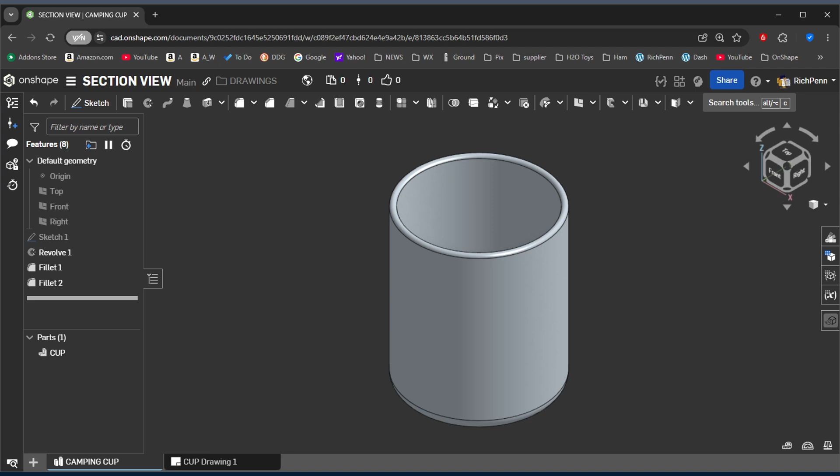This is the model we're going to build in Onshape, or whatever you wish to build it in. It's fairly simple. We're going to build it out of 3 rectangles, 2 straight lines, and a fillet. It's a little different way to build it, but it's kind of fun. Then we're going to come over using the standard drafting tools, no tricks, no shortcuts, just simple drafting, and we're going to come up with this. So grab a copy of this, and here we go.

Okay, starting in Onshape in a new part studio, we'll go to the hamburger menu, pull down, check that the length is in millimeters, and we are in grams for mechanical mass. Green check mark, and we will start.

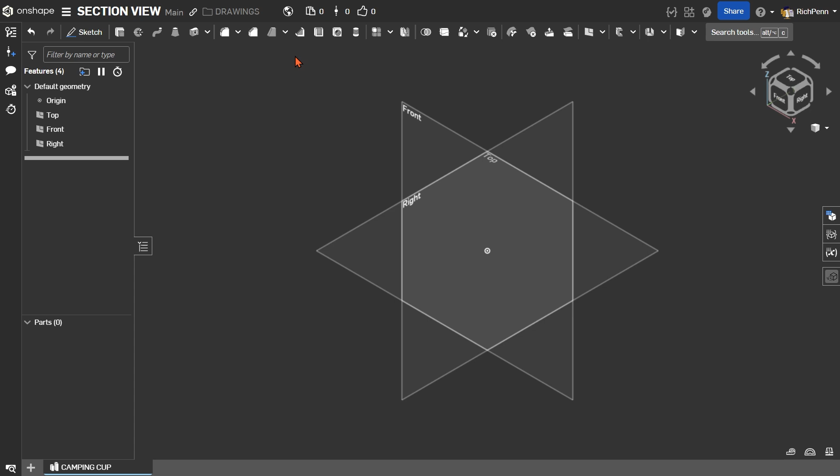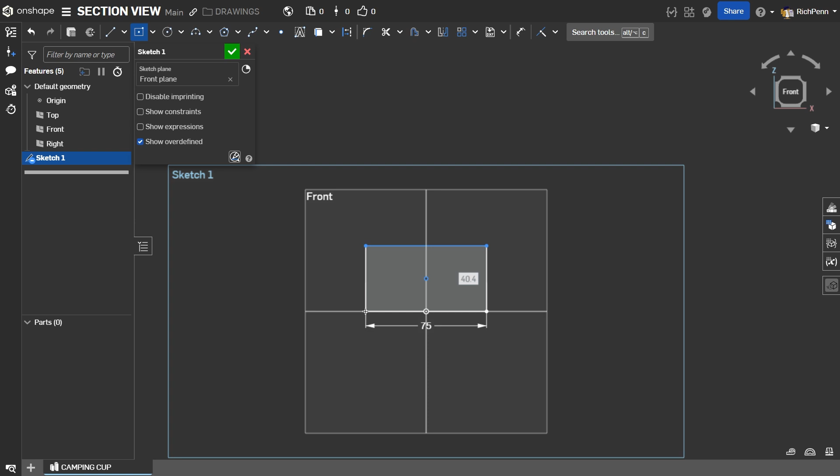I'm going to start on the front plane with a sketch, N for normal, and the bottom of the part is 75 diameter, so I'm going to go to center point rectangle, which is a shortcut key R. Select anywhere on the y-axis, anywhere on the x-axis, type in 75, and the floor of it is 7 thick.

Then I'm going to zoom in a little bit and do the same thing again for the inset. The inset is 55 wide and 3 deep. The wall is 3 thick.

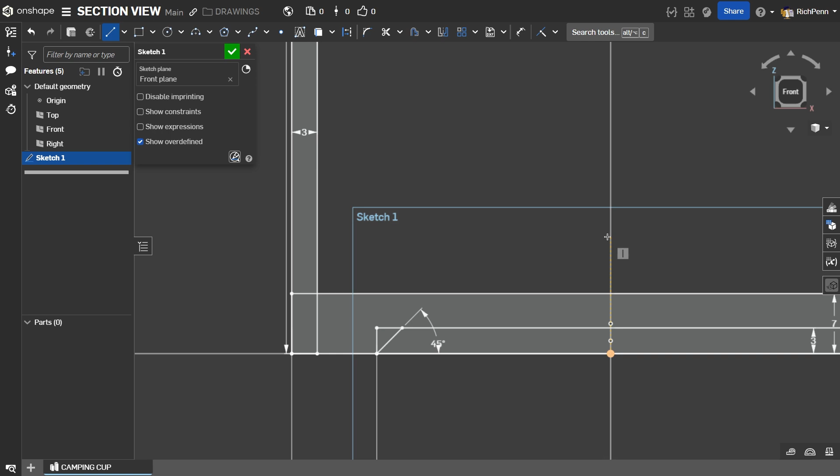I'm going to go to G for corner rectangle, pull up a little bit. 3 is the width, 90 is the height. Then I'm going to zoom in, select the line tool, draw a 45, and dimension it with D for dimension at 45. Escape, L for line, draw a short line segment on the y-axis, and we have finished the sketch.

Green check mark, we will go to the revolve. We will select these parts. The revolve axis becomes the line we drew. Green check mark, and we have a part.

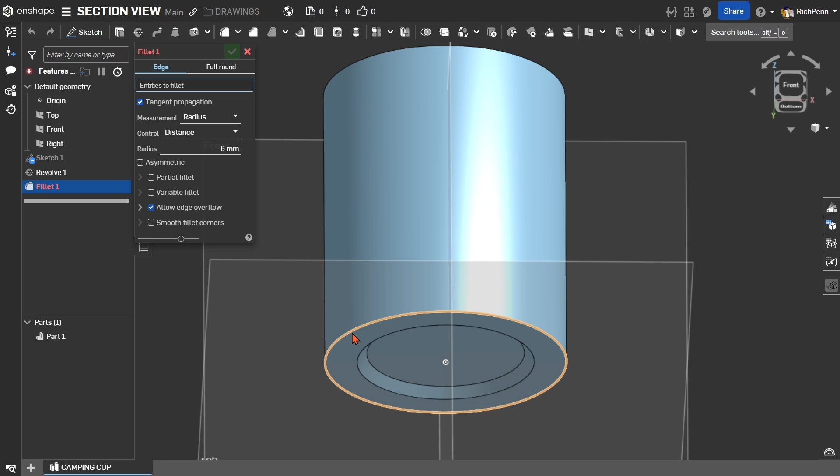We will go to the fillet command, 6 millimeter, select the bottom ring, and we need one in the top ring, and it looks difficult to select, but you don't have to select it. You can simply select the face in the bottom of the cup, and you get the same thing, much quicker.

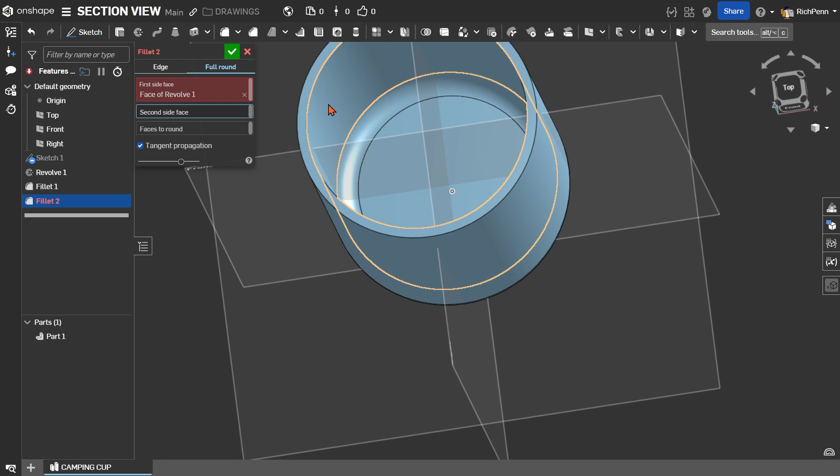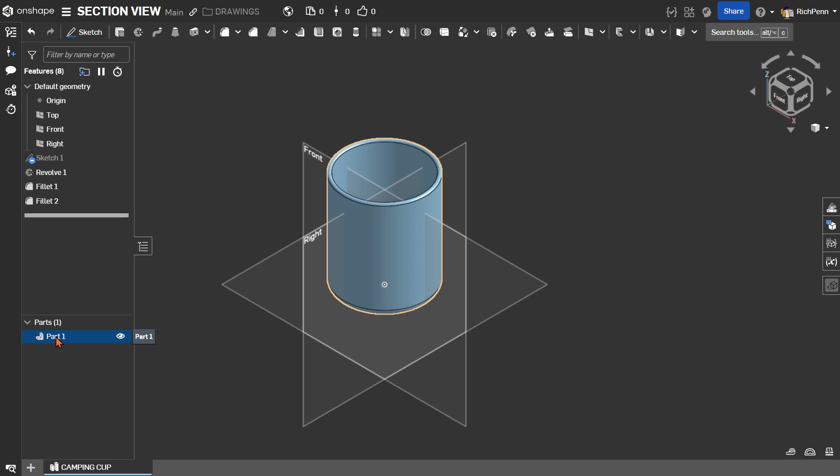Green check mark, one more fillet. This time we'll use full round. Select the inside wall, select the outside wall, and select the top lip, and a green check mark, and the part is finished. We will right click on the part, select Assign Material. Out of the Onshape library, we're going to take 300 stainless. It's not what the model's got on Toby's thing, but it'll work fine for what we want to do. And one more time, we're going to right-click part, select Appearance, and pick an alternate color of some kind. And we have finished this.

Type P for planes to get rid of them, and we're ready to start a drawing. To start the drawing, we will right-click on Part, select Create Drawing. We will go to Existing Templates, ANSI, B, millimeter, No View, click.

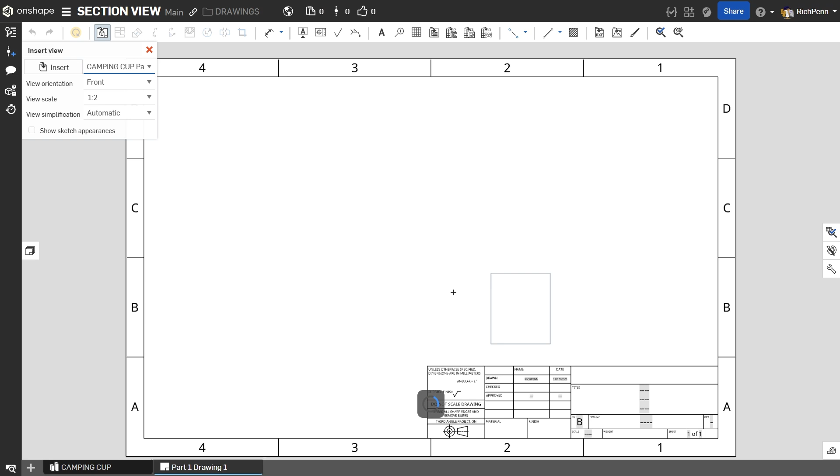When it comes up, it will come up in Insert View mode with a front view of the cup. We'll click once, move up, click a second time, and we'll get a top view, hopefully. And we'll come back down.

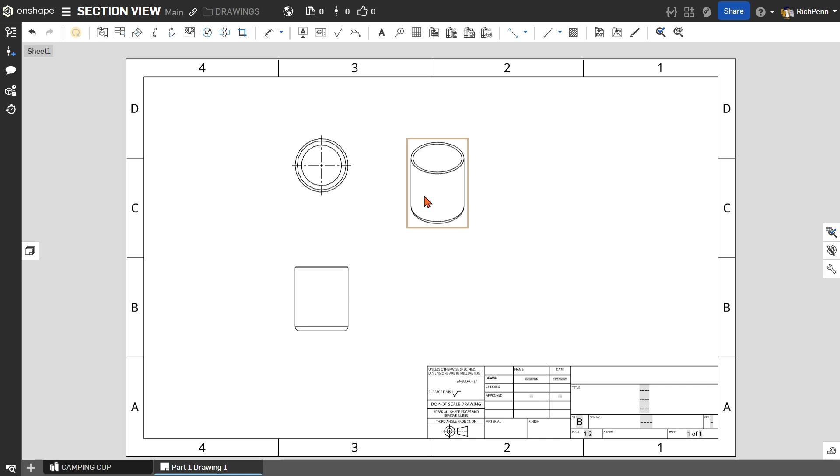I'm going to click this and go diagonal up and get an isometric. Do an escape to get out of insert. I'm going to pull this over, park it, right click, show hide, shaded view. And that gives us our isometric.

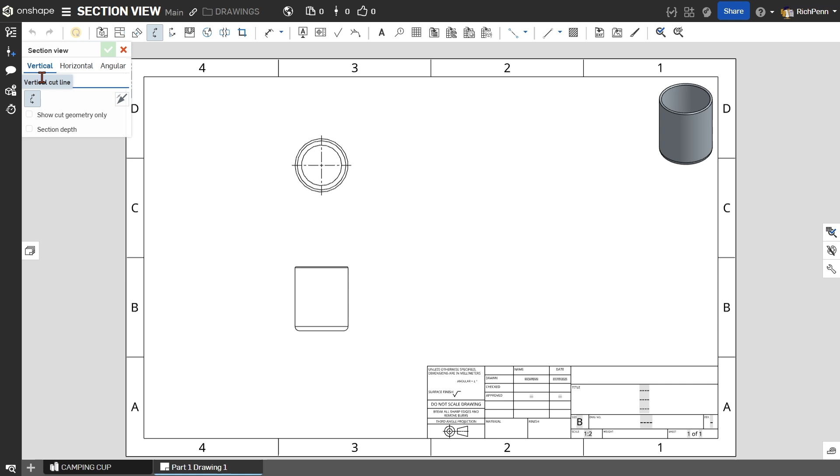We need a section view through the cup. So I'm going to the section view tool, go to vertical. I'm going to take the center, which will be the diamond. I'm going to click once and pull right and click again. That's the section. Do escape.

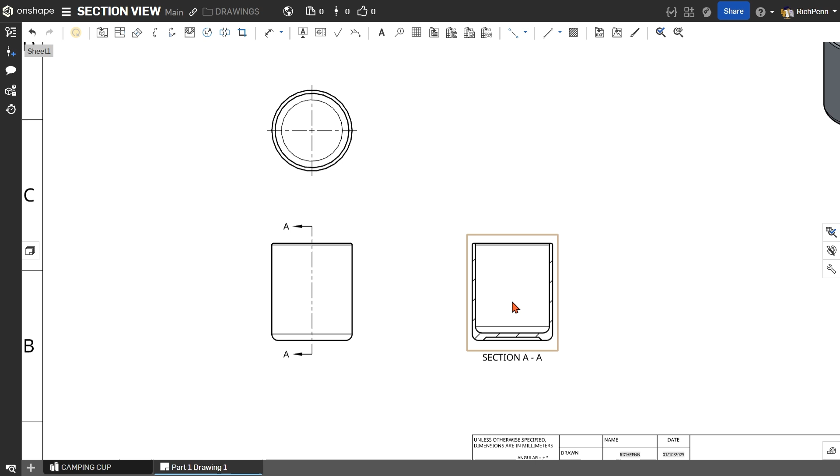What I really want is I want this to be full size and not half size. But also this has a relationship between them, so if I move this, I move that, and I want to break that relationship. Double click left mouse button, select suppress alignment, and then right above it, set this to 1:1, green check mark, and we have our section view.

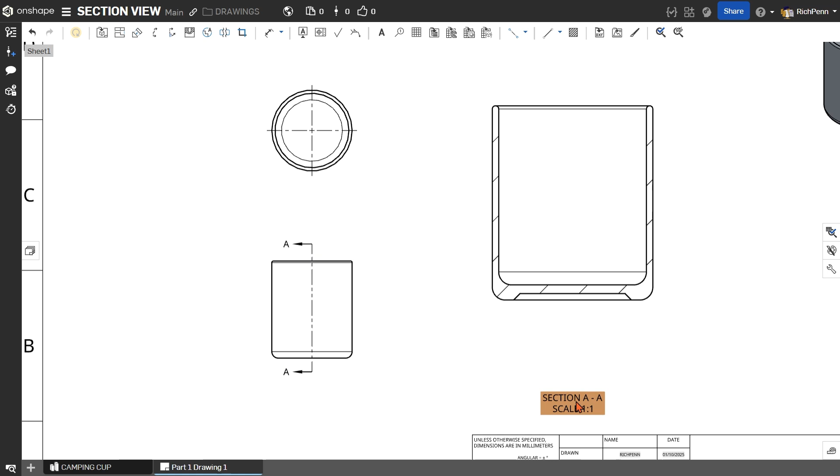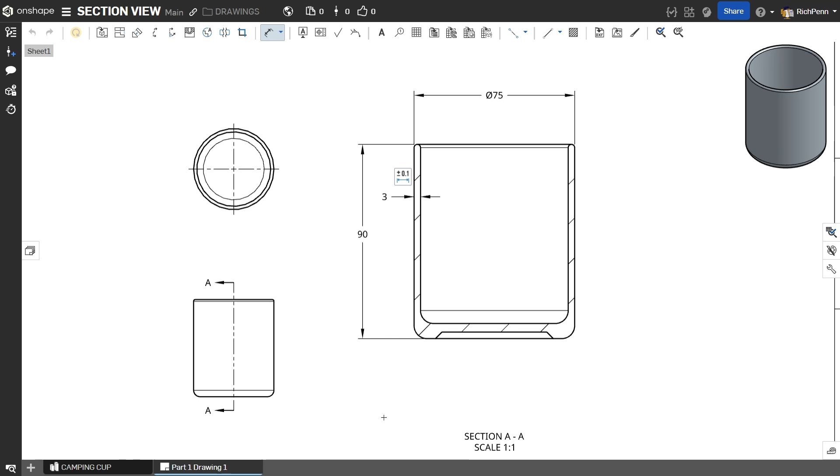Most of this is just like the first part we did: outside, outside, 75, top line, bottom line, 90, wall thickness is 3. What else do we need? We need the inset for

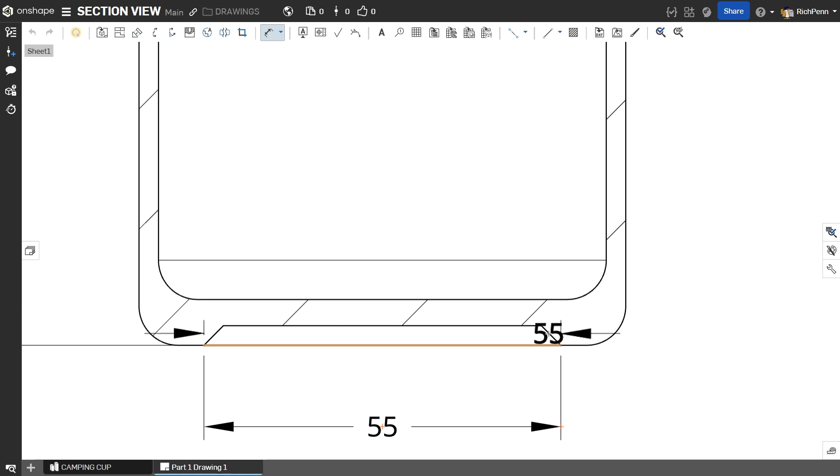the diameter of 55. And we need an angle dimension on this little piece of line right here. Maybe. I missed it, sorry about that. Here to here, 45 degrees. And that defines this inset.

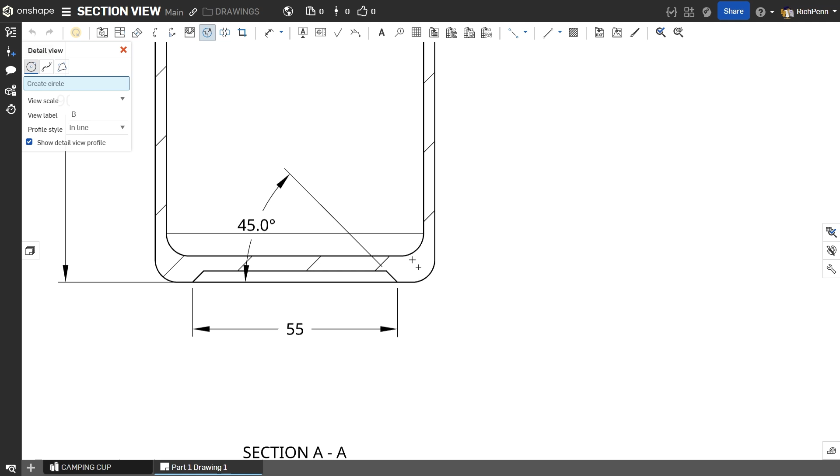Except for the dimension, we will do a detailed drawing of this corner. To do that, we will come up to the Detail View tool, click it, select somewhere in this and pull a circle, click and slide over, and that's the detail. The detail is twice as large as the original by default.

We'll do D for dimension. Dimension that radius, dimension that radius. We'll dimension the 3, and we'll dimension the 4. And that just about finishes what we need.

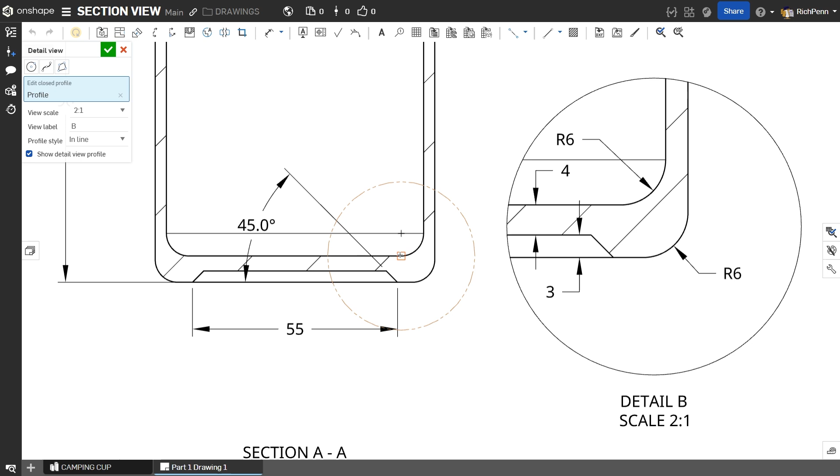What I would really like is to have this circle slightly to the left. To do that, I can escape to get out of dimension, double click the circle that defines it, and I get 5 blue dots. I can grab it and simply slide it. I can make it smaller by pulling on one of the dots, and then do a green check mark, and it will redefine this for me.

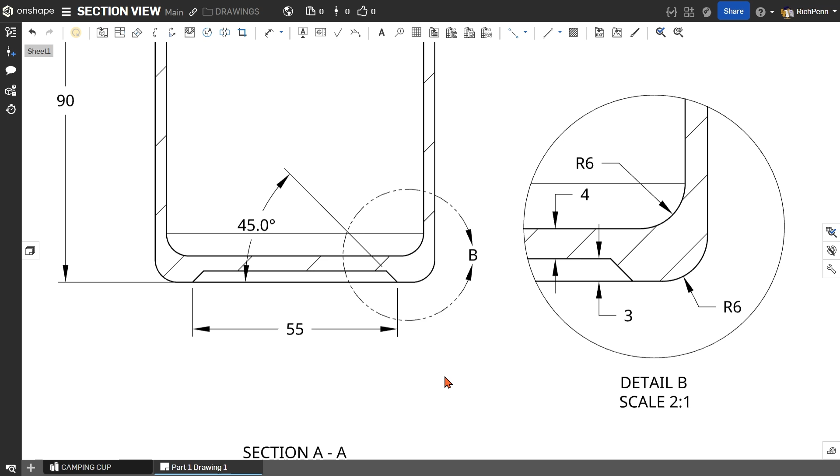That works almost. I got it just a hair too far, so I will double click, move it ever so slightly, green check mark, and I'm in. And then if I want to turn this, I can click on that brown dot, and that will turn the leader 180 degrees over. So that finishes pretty much the entire thing except for the upper radius, which is a little bitty radius.

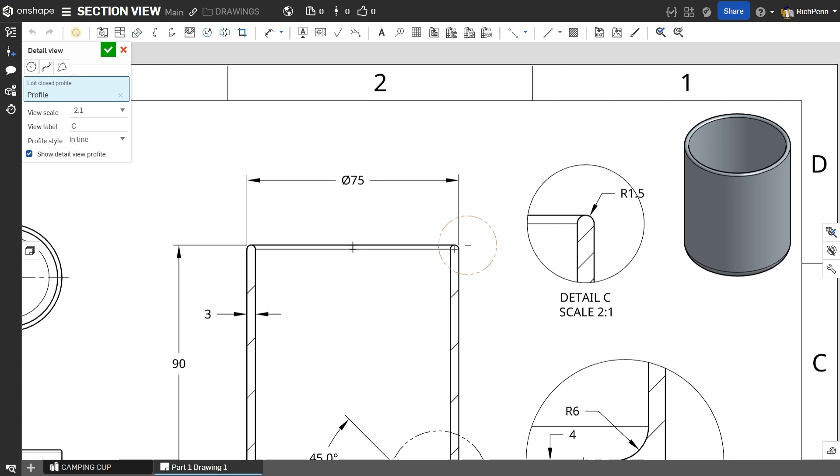So we will do Detail View, another pull out, a D for dimension, select that, pull it out, and it looks like I need to realign that one. So escape, double click, grab the center, pull slightly, green check mark, and there we go.

That finishes the drawing except for the title block. We went through the title block last time. I'm going to skip it this time.

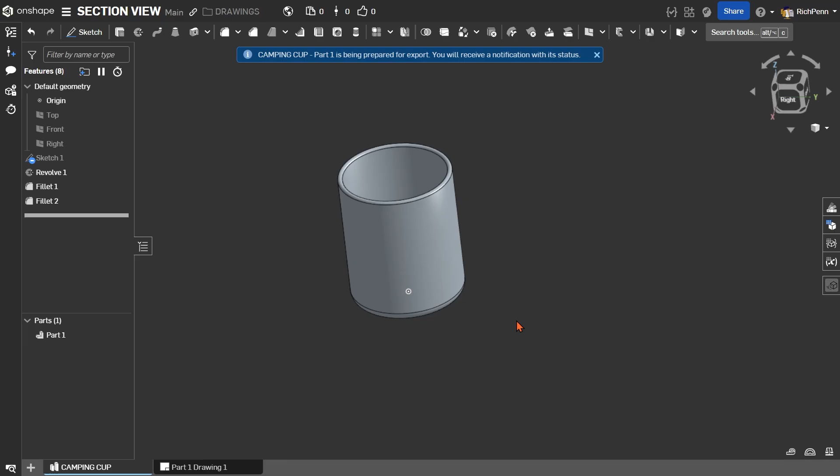The one thing I do want to show you, when you're in the Part Studio, if you right-click the part and select Export, one of the options is STL file. Take the binary, millimeter, whatever your system likes best, hit Export, and there it is right there. Double-click on the file, load it up, and we're ready to print.